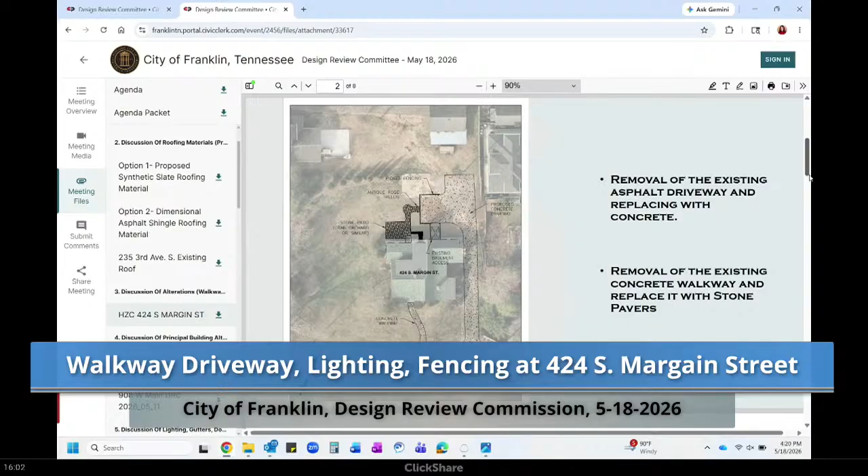And we would put the existing front walk to the front door back in its same location, but we'd like to pave it with stone pavers, similar to Crab Orchard stone, in an ashlar pattern. And we have a patio in the back near the rear door that we'd also like to be an ashlar pattern of stone.

And then we'd separate the parking area from the patio with a 3 to 3.5 foot picket fence, which I think I have. There's the pattern of the stone we'd use for the front walkway and driveway with cobblestone edging. It's not a bright white concrete, it's similar to being sandblasted, but you don't have the mess of sandblasting with sand particles going everywhere. And there's a picture of the proposed fence.

We exchanged a light fixture on the front of the house to a gas light fixture. And then we were forced by electrical codes to put an electric light fixture by the side door on the front of the house, right there. And those are copper fixtures made by Bevolo, a reputable company out of New Orleans. And that's what we would like to do.

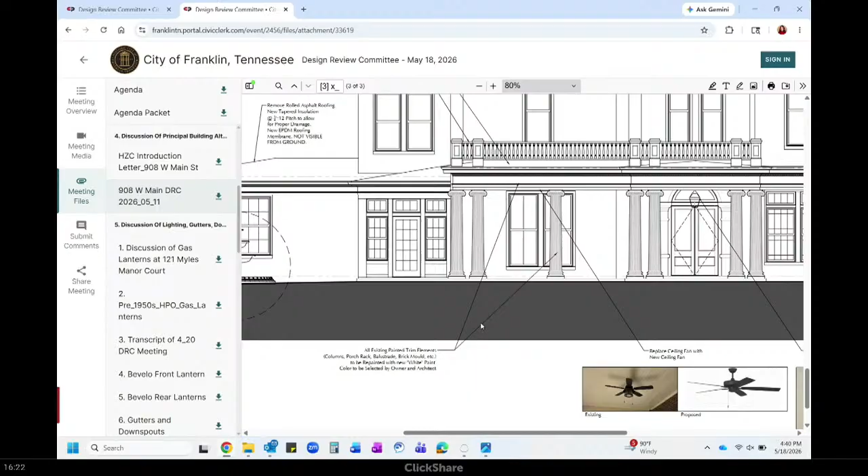A new ceiling fan and a new light fixture. The light fixture is that sort of lantern there that you see on the right. It will not have a solid back on it, it will actually suspend from the ceiling. But that's the best picture that 14th Colony has of that particular style. And you see what's there today, this kind of hexagonal lantern. Did I catch everything?

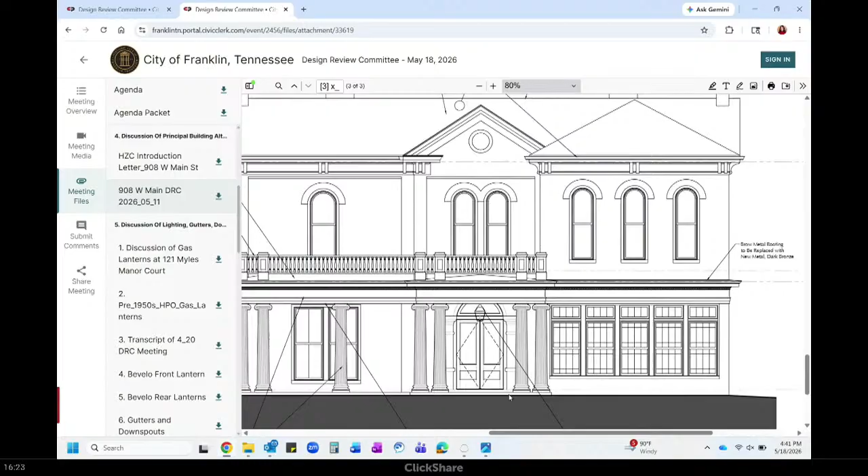The fountain doesn't work, nor does the pool hold water, so they're going to replace it with that fountain there, which is of similar scale and size to the one that's there. I think I've heard from many neighbors they're excited to get the fountain back in that view and just kind of the noise of it walking down Main. So those are the items we have for this trip.

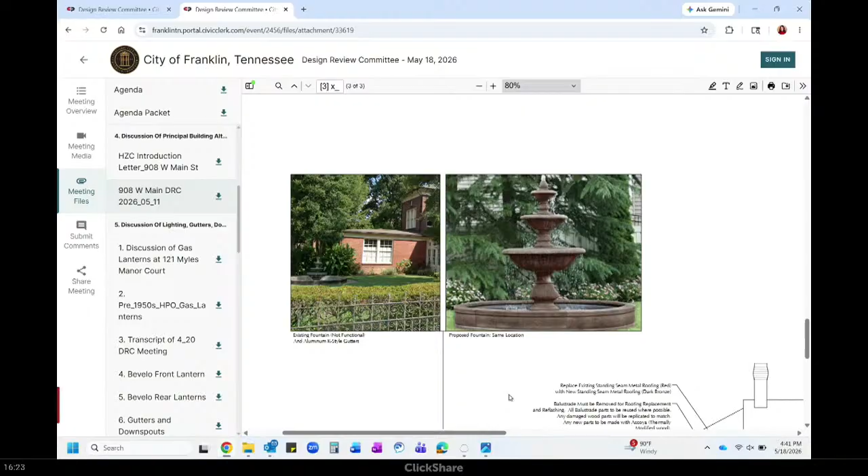Thank you. The property located at 908 West Main, locally known as Maple Dean, is located in the Hincheyville National Register Historic District and is considered a contributing 1881 building. The proposal includes alterations to the roof, repainting areas that are currently painted, reinstallation of a square pilaster to the front of the building, repairing and replacing deteriorated wood elements, replacement of a fountain, replacement of ceiling fans, K-style gutters, and a new light fixture on the front of the building. All of the proposed alterations appear to align with the guidelines. It is recommended to include photos and a description of the pilaster that is proposed to be recreated on the front elevation for the Historic Zoning Commission to review. Thank you.

So this pilaster, there's one on the other side that you would be going by? No, there's not, we just have a picture of it. And it looks as though they've got some paint and caulk lines that are stuck to the brick, so we know the exact profile of the crown and everything that was on it. And then we have a picture of it looking kind of right at that corner. And you can tell from the plinth, which is a limestone plinth, that it was a square column. We have the picture of it, and we'll be able to recreate the profile. I don't know that this whole porch on the front is original to the first version of this house. Yeah, there's the brick pilaster, but there's an actual column outline on that pilaster back there. It's kind of peculiar.

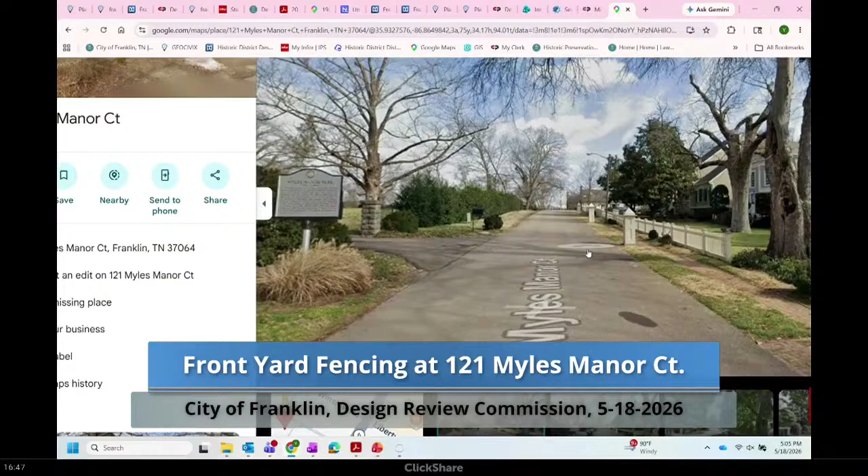and look at it, because, I mean, I know these homes are built in the 90s, but they are very much designed to be like historic homes. These fences are more stylized, which is some of what we took inspiration from.

But we would not do that. That was some infill project done before historic zoning. Yeah, and I don't know that those fences would have been approved.

Okay, but you do like the one on the corner? Yeah. I don't think... you can tell all those are very similar, but one looks more appropriate than the other. And it's just those little scale things, the width of the pickets, all the connections. It's all those little things that make it right or not.

So I think you're headed in the right direction, it's just simplifying what you had pulled up. If you were using that one on Main Street as precedence, well, that's beautiful, but just remember your house is a little simpler than that one, and that's it. I think you're headed in the right direction.

Cool, it's a beautiful fence, and it's spectacular. But I do think that if you did something like this in front of your house, it would be sort of the fence that's wearing the house instead of the house wearing the fence. And I think that the simpler version would be a beautiful addition to what you're doing.

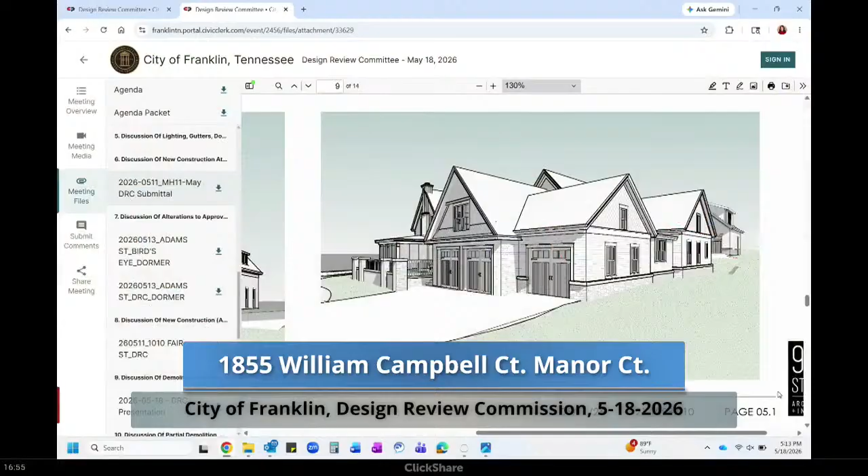The roofing configuration is somewhat complex in comparison to the traditional roofing configurations seen on the historic mansion. The guidelines recommend reinforcing and maintaining roof forms and orientations of adjacent structures. One end of the primary ridge has a hipped roof, and the other end has a gable, which appears to be a roof form not common in adjacent buildings.

Additional details and ornamentation are proposed on the building with the proposed fish scale siding. Feedback about the proposed detailing as it relates to the architectural style, in comparison to the historic mansion, would be appreciated.

The front porch configuration appears consistent with the location of porches seen on the street and on the architectural style. The columns proposed utilize a stone base and round column on top. The guidelines recommend designing porches with depths of at least 6 feet and simple columns and balusters using wood or brick elements. A stone foundation is proposed around the building, and the guidelines recommend brick, concrete, stucco, or painted CMU for foundations. Feedback about the foundation configuration and materials would be appreciated.

The front entrance is a set of double doors that appear to be 2/3 light and paneled, featuring a transom window. A number of different sized windows are proposed, as well as architectural windows on the front facade. The windows feature a 2/2 light pattern and have the appearance of being double hung. The windows in the gable on the front appear to intercept trim pieces.

On the left elevation, a set of double windows appears to be located in a non-traditional location, not in alignment with the other windows. Feedback about the proposed window size and placement would be appreciated, as the guidelines recommend maintaining the rhythm and spacing of windows and door openings of adjacent structures, and not exceeding the height and width ratios of windows and doors of adjacent buildings by more than 10%.

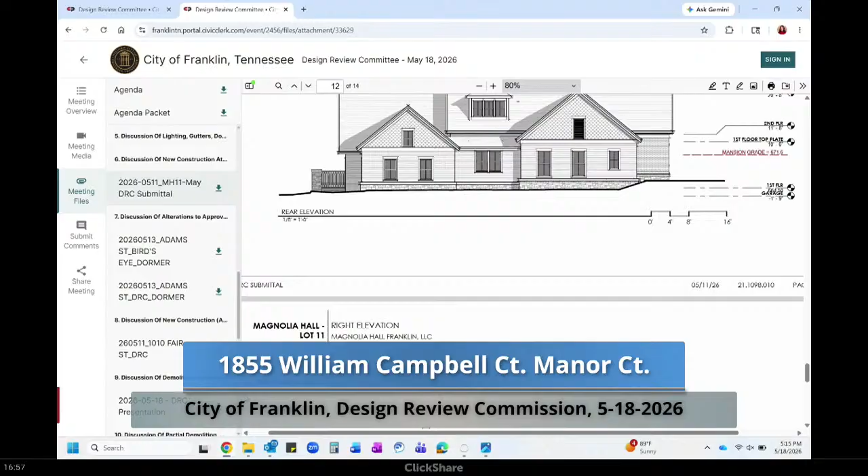Thank you. Okay, thank you. All right, anyone want to start?

Can I say one thing on the stone foundations? Sure, go ahead. We do have stone foundations on all of the other houses in the neighborhood. Okay. Understood.

I can start with a couple comments, I guess. I like the adjustments you made. I feel like it's starting to at least look like a particular style. There was a little bit of this, a little bit of that.

I agree with staff that this hip on one side, gable on the other, is a little odd, and I think it might help the elevation and give you more space to just gable that other end, square it back off. Even though there's a lot of roof gymnastics going on behind, I think it puts the front of the house in a somewhat purer format where you've got a main roof and some appendages like the front facing gables and a dormer. It will feel simple, as opposed to having a little hip here, a gable there, where the hip accentuates the roof plane of that front facing gable in a way that might truncate it a little bit, making it feel more traditional.

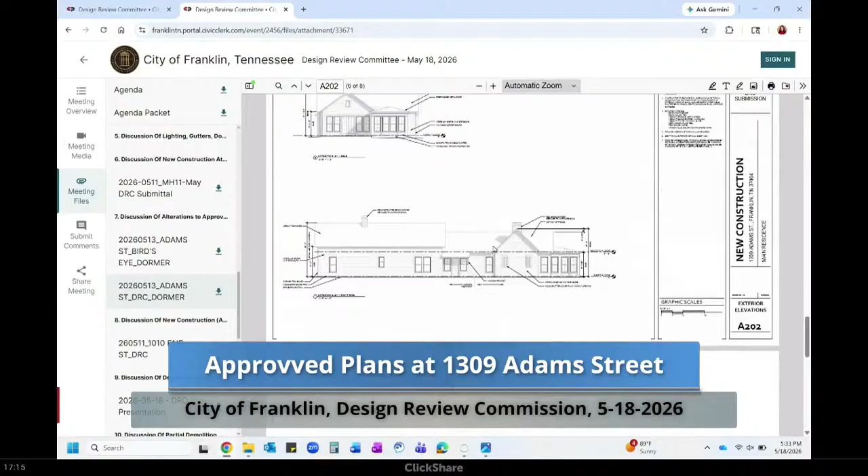There's a section cut as well on another document, if that might be helpful, so you can understand the space inside there and what we're working with. It's on page A301... there we go. So you can see how it's tucked inside the gable itself. It's not this big cavernous thing we are asking for up on top. It's still very small, and we've squished it as much as we feel is comfortable to make it still usable.

Any feedback, anybody?

Mary asked: So it is going to be the same height as the roof of the house, is that correct? It is stepped down from the main gable. It's stepped down, yes, about that much.

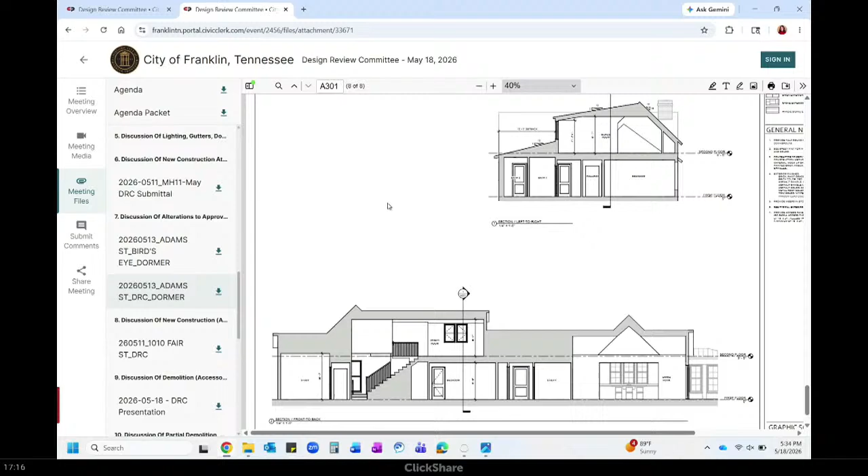I'm looking at that section. The thing that has made me not be a fan of this is we're losing the main form, in my mind, of the house that was originally there. And...

I don't know if it maybe came out further and lined up with where the little window that looks like a bathroom window is, if it came to that corner and lined up, would you read the main form of the house better? I don't know. That is where my concern is, just trying to appreciate what was there and what we're trying to replace with infill because it was...

...such bad condition. Mr. Chair, can I interject too? Go ahead, Kathy. I understand exactly what you're saying, but Ben, thank you for these two bird's eye views, which sometimes helps clarify things, but sometimes this is not how we see it in the real world.

You will never see this little top addition. I think if, to your point Mary, we brought it more to form-fit the existing part of the house, that would have a reverse effect on it. And remember, we're viewing this from the ground, so I think they've accomplished it, but you're going to view it from a distance too.

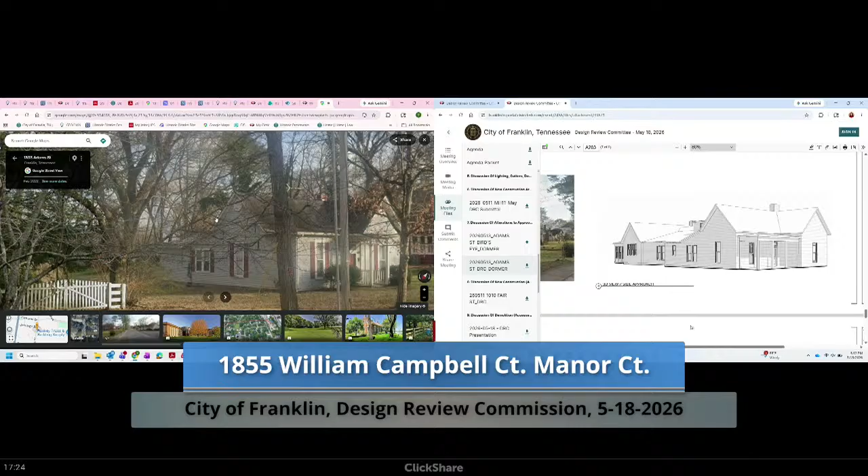I've drove down this street like 10 times this weekend, going back and forth, trying to look out the corner of my eye to see what I would see. You'll see a peek of it, but I think what's going to be a huge help to that roof line is this addition—your eye's going to be drawn further back. The house isn't just stopping right there, it keeps going.

I think what we do see of it does look more like a traditional dormer, as if it were just the dormer with the two windows. If you didn't walk in the yard and go look, you'll never know that even existed. So it looks like from the street a traditional dormer. It's a shed dormer, which is pretty common, especially for this style of house—oftentimes had a rear-facing gable added on, and then they would sometimes peel up the roof to give a little bit of volume. I think that's what this is going to look like, even though there's a little connecting piece that nobody's going to see. So I don't have a problem with this as it's shown.

It's hidden enough, and it looks like a traditional dormer from any public view shed, and that's really what I think the guidelines are aiming at.

If this were pulled out further, we'd get into that discussion where this looks like a two-story house, and it's not. I don't think this looks like two-story, it looks like a dormer. It's way back on the roof. How far back on the roof is it?

It's a dimension down here, it's like 12 feet back, away from the edge. Yeah, it's 13, some change. So our rules say a foot, and this is 13 times that, so it's going to sit pretty far back.

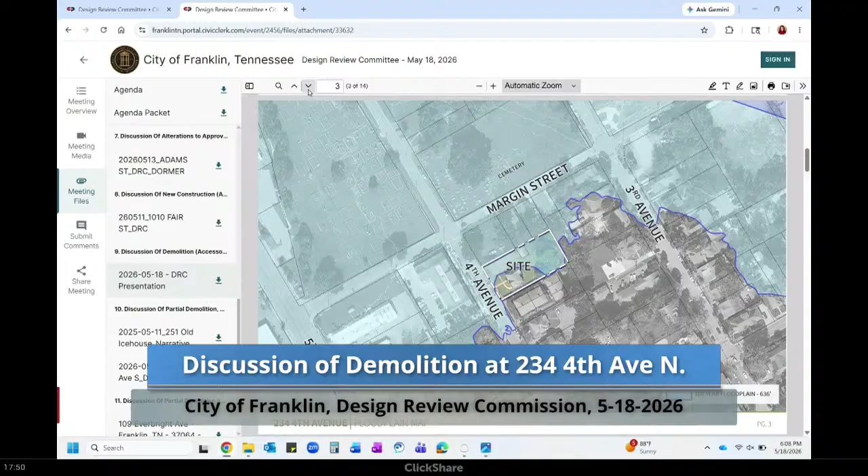So we've been working hard with the team to come up with something we feel will be a really helpful addition, not only for our purposes but for the lot itself. With that, I'll turn it over to them.

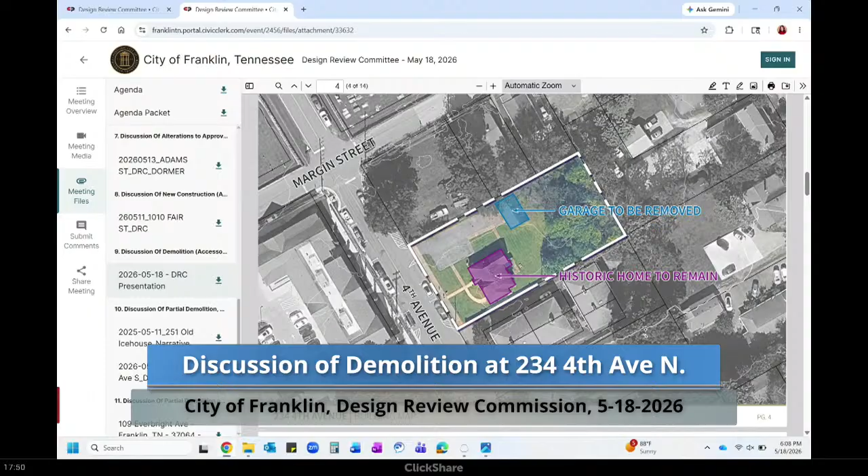Hi, I'm Greg Gamble. I'd like to give you a little background on the property for context. If you go to slide 2, this is its location, on 4th Avenue. This is 234 4th Avenue. It's not on the corner of Margin, there's another lot in between.

On the zoning map, the site is zoned office residential, meaning anything new has to be built in a residential form. It can have one principal structure and an accessory structure, so it's treated like a single-family residential home, but office is a permitted use on this property. The property directly adjacent, fronting onto Margin Street, is in the 5th Avenue district, and on those properties parking can be under the building, which is one of the unique aspects of that district.

On the next slide, this shows the extents of the 100-year floodplain from the Harpeth River. You can see about two-thirds of the property at 234 is currently within the 100-year flood limits, and the accessory structure we'll be talking about today is also within the 100-year floodplain. This is the location—the accessory structure is the garage, the building shown in blue.

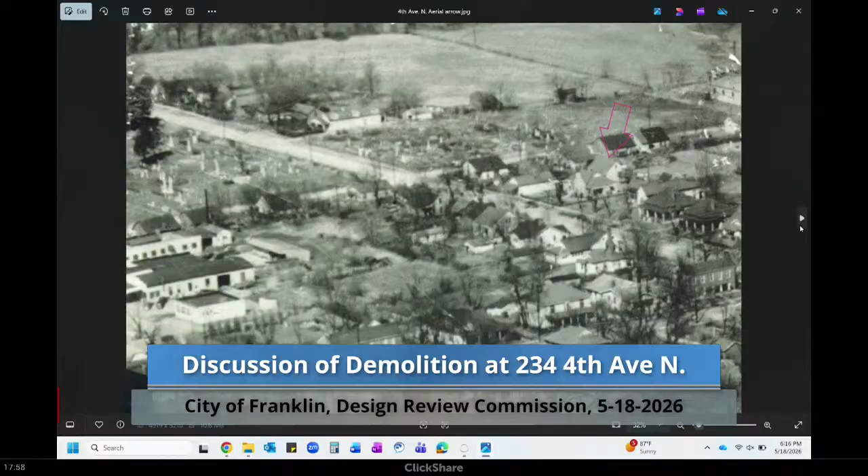Then the next image is from the 1948 flood. So if you zoom in by the arrow, you can see the structure, the gable.

So it is up to the Historic Zoning Commission to determine if it is contributing to the historic district.

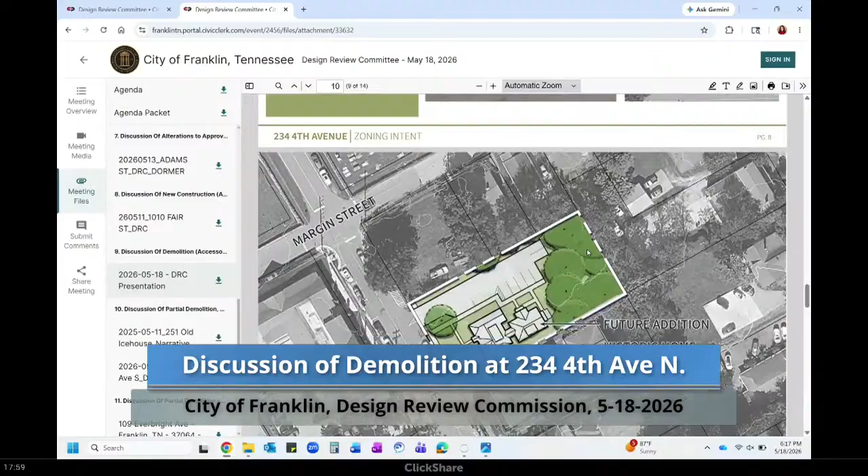For the request, so that is for the demolition, to move on to the proposal for an addition, the request to construct an addition to the principal building, information is needed to determine the historic footprint of the principal building and if the proposed addition is appropriately sized.

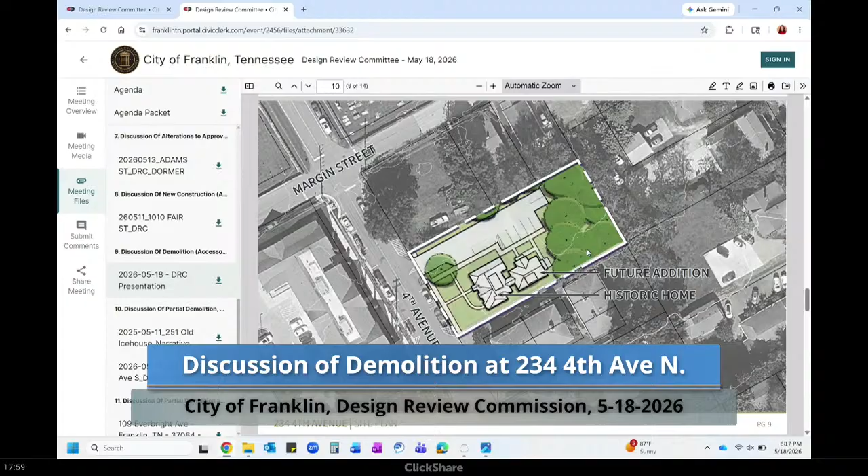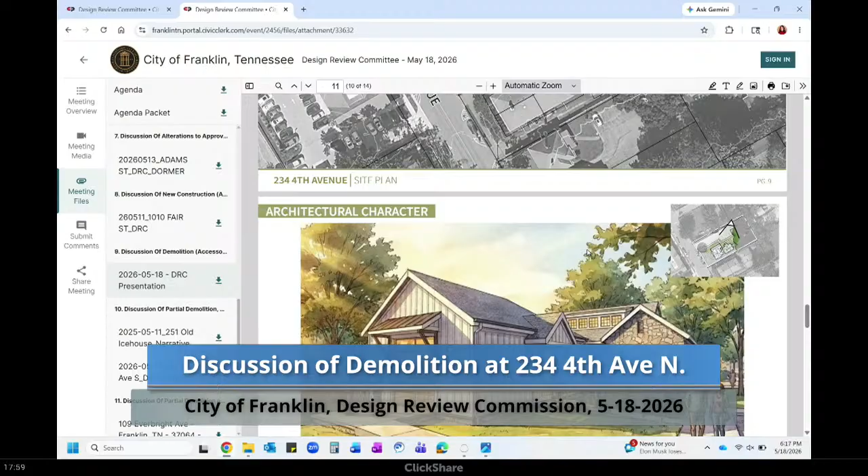In terms of materials, it may be more appropriate to utilize horizontal lap siding on the addition so that it would blend better with other elements seen on the building. On this elevation, you can see that there are different roof lines, that one is hipped and one is gabled.

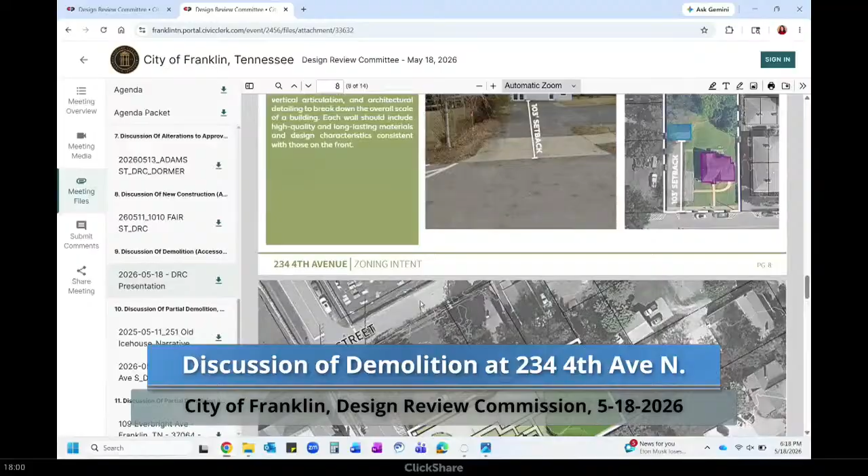For the entrance, the guidelines recommend designing doors and doorways to an addition to read as secondary in appearance and detailing to the historic building. The main entrance to the historic building is a simplified entrance, just a 15-light door. So the double door with detailing does appear to be a little bit more elaborate than the front door.

Several project considerations were left on the project review. I did want to highlight one of them that states, while it's not on the plans for approval, the proposed addition appears to be bringing the existing structure into the 100-year floodplain. It is recommended to reach out to staff and schedule a meeting to discuss the proposed addition and floodplain requirements that could give significant impact on the design of the addition. Thank you.

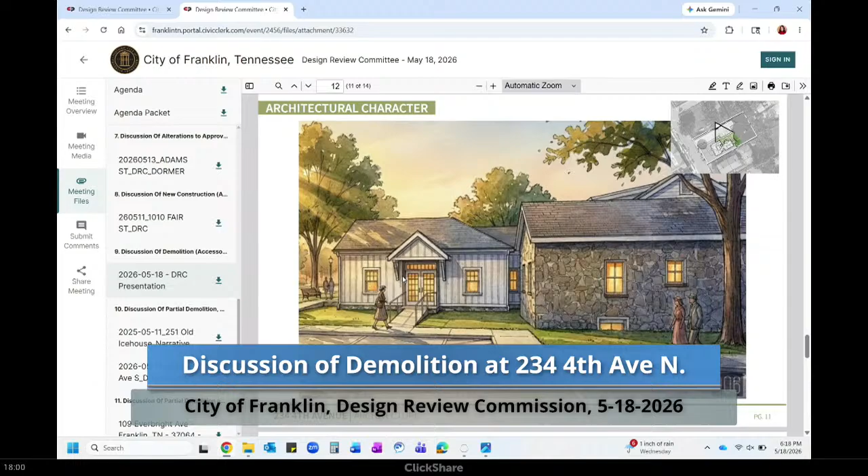So what was that last one, the new additions in the floodplain? Yes, we specifically kept... I don't know if we've got an overlay that shows both the addition and the floodplain. You can barely see it on page 9. There's a little white line that represents the floodplain. If you zoom in, that little line.

Okay, I was like, what are we talking about then? So it's this white line that runs through the woods, cuts out towards the parking lot, runs down the parking lot. That's the one, because there's a bunch of white lines, but that's the one, that's the floodplain.

And I did want to provide that the accessory structure would not need a variance to be raised, as that is not something that is required if it is used for storage and/or parking. Storage or garage, it doesn't have to be raised. Correct. Okay, all right. Let's hear from some commissioners here.

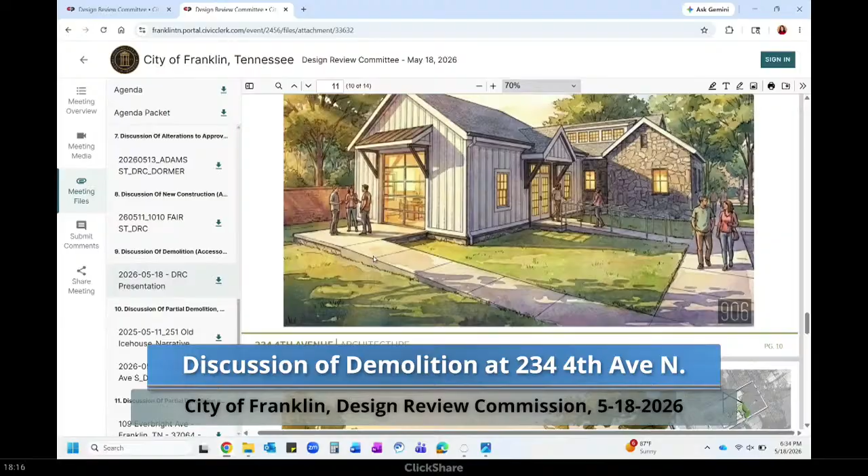So potentially we could just have one instead of both. Yeah, we ended up - the first one to the right, I guess you'd say, was coming directly off the parking lot for convenience. We added the other one for loading and unloading, and since we're gonna do that overhead door, it doesn't function as an accessible entry point.

But because the slopes were a little lower, we thought it might make sense - I think it'll make more sense if there's not a railing there. Well, maybe you can grade some of that out. It only looks like 8 or 10 inches. At least one of them you could grade out, and the other one...

Greg will tell you all the horror stories of trying to grade near a floodplain. So have fun with that. If you know what a HEC-RAS model is, it's my favorite thing in the world.

Okay, the roof line thing - one side hipped, if you can gable both ends, I think it'll just look more correct. There's instances where you have to do that. This may not be one of them.

Go ahead, Mary. I don't see putting the transom there - it's supposed to read secondary to the house. I have similar comments too, that it just looks heavy in the middle, with the brackets. Yeah, I don't disagree, it's just too overbearing.

And then, could you get away with a single door? I think so, especially with the sidelights point from earlier - the loading entrance is on the back, so it would still be ADA compliant. I think there's a couple levels of simplification that can make that feel lighter and feel a little better.

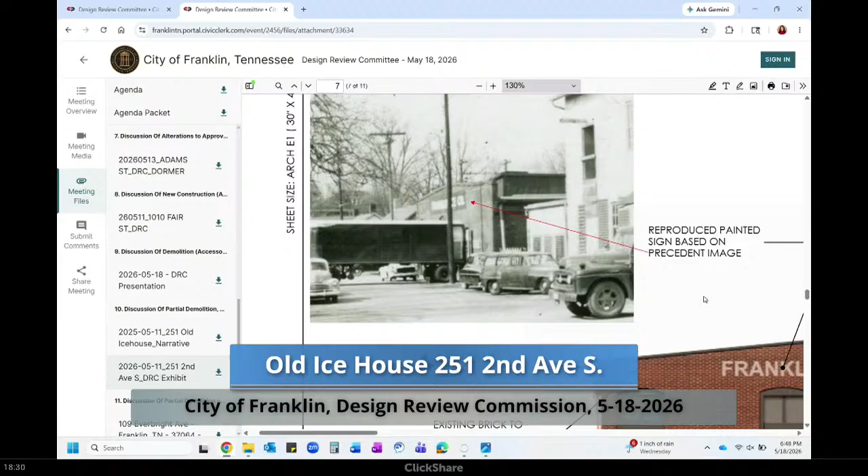I will say we had the Franklin Ice Company. That's a new piece we proposed, inspired by this photograph where we've got precedent for having something there previously. We thought it would be a way to bring back that faded lettering, again celebrating the history of the site. So those are the changes.

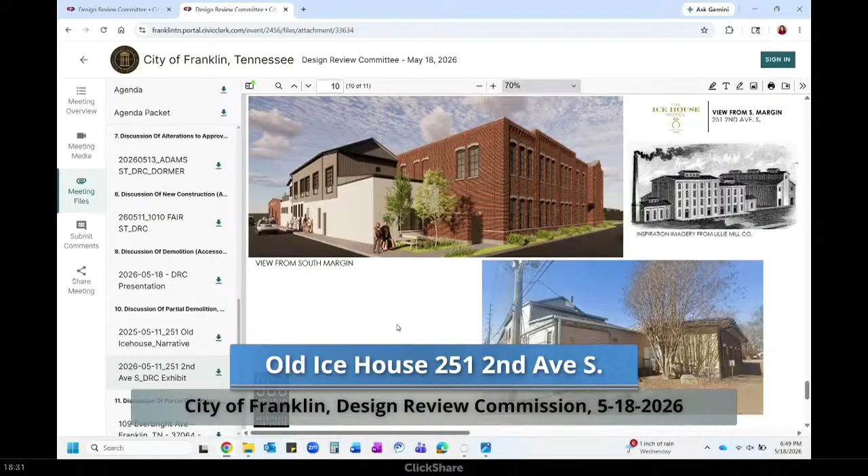The proposed addition appears to remain subordinate in height and scale to the remainder of the historic building on the site. Feedback about the proposed brick detailing on the 2-story addition would be appreciated, as the guidelines recommend using details and ornamentation similar in character and proportion, but less elaborate than those on the historic building, which appears very simple in detailing. Additional feedback about the proposed windows would be appreciated.

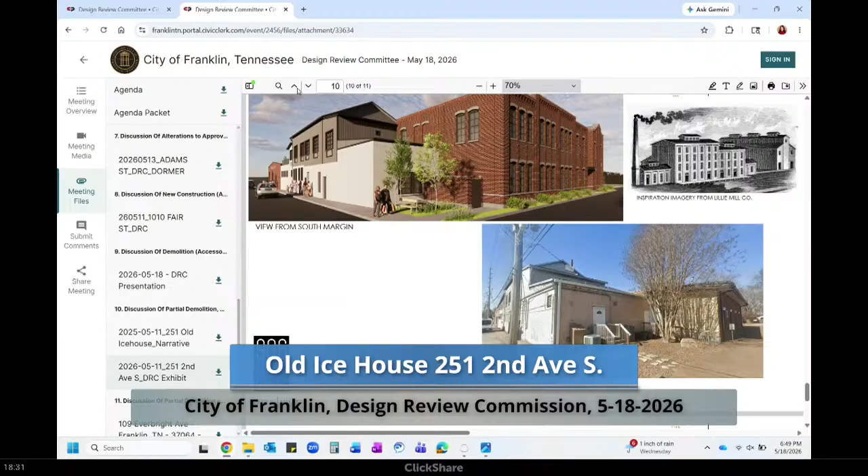Alterations to the building include adding 3 new openings along South Margin Street and on the rear of the building. The guidelines recommend against adding new openings along highly visible facades. Feedback on this would be appreciated.

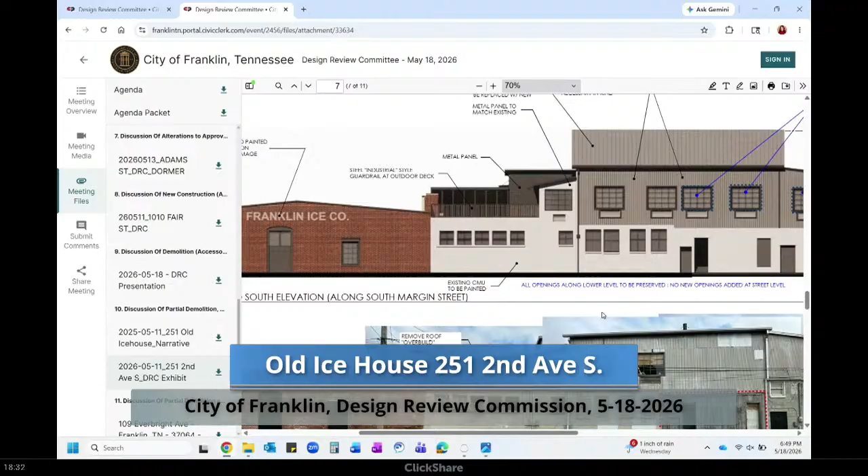Additionally, changes have been made to the new rooftop feature, where sections of the roofing are proposed to be removed. New openings are proposed to the section of the 2-story chicken processing plant part of the site on the left elevation that will be visible.

On the rooftop, new chimneys are proposed in an undulating pattern. Feedback about whether or not chimneys are appropriate to the building and site would be appreciated, as the guidelines recommend it is considered appropriate to design chimneys to be compatible in materials and detailing, but simpler and subordinate in massing and height to historic chimneys. The proposed chimneys appear simple in detailing, and additional perspectives may be needed to understand the visibility of this element.

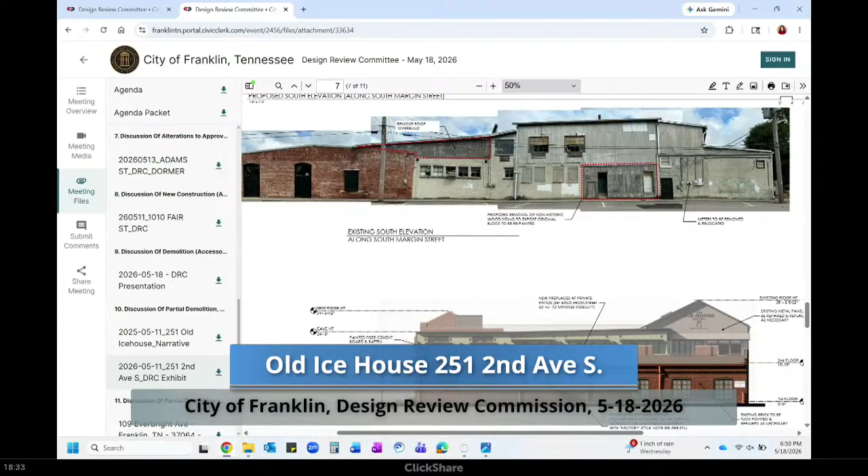It is now proposed to replace the non-historic windows on the ice house with new multi-light windows. Additional information about the window materials and profiles are needed for consideration, and feedback from the commissioners would be appreciated about the proposed window pattern for the sections of the historic building and the proposed pattern on the addition as well. The guidelines recommend using window patterns and historic profiles and dimensions that match the light pattern of windows on the historic building, of which there are very few examples left.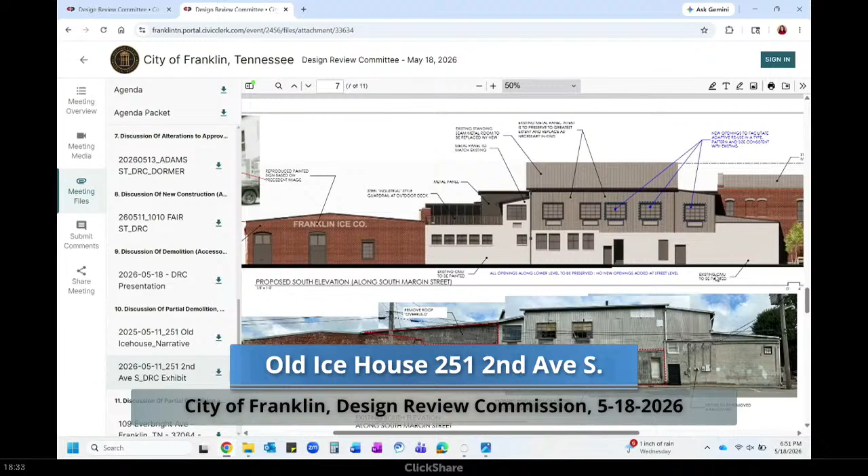Windows should have distinct meeting rails and have the appearance of being operable. The guidelines for additions to historic buildings, and guidelines for historic buildings, recommend for late 19th century buildings 4/4, 2/2, or 1/1, and for early 20th century designs, 1/1 sashes would be installed. The site features a unique combination of ages and buildings added over time, and has a unique utilitarian history, so feedback about the proposed window design profiles would be appreciated.

And so we commend the applicant for noting the preservation of materials where possible, and additional information comparing the proposed replacement materials would be needed. Thank you.

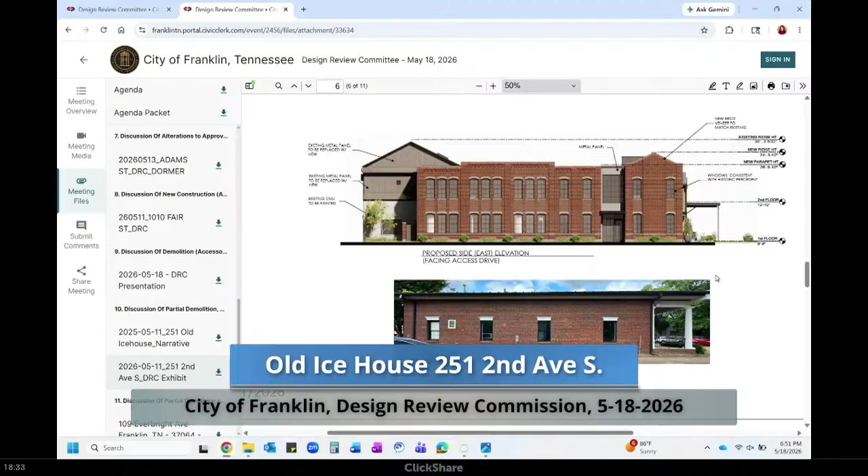Okay, thank you. All right. Somebody want to start us? Kathy?

I think it's looking really fantastic. And I'm happy for the name, the Ice House, not Chicken Shack. Troy's idea, Chicken Shack—I wanted Chicken Shack. Troy wanted Ice House. Not a happy place for the chickens to go, but anyway.

Something that stuck out with what staff was talking about was identifying the new building. The brickwork is beautiful, but it almost looks like the new portion appears to be the historical portion. So it's kind of a play on the simplicity of the historical brick building. How do we tone this down, but still give it detailing so that it reads well? It reads beautifully.

But if I knew nothing about this project, I would say that's the historical building, the one on the top. So removing the balconies was awesome, because it does not look like Broadway where everybody's hanging out off of the end. It just really gave it a lot more character and presence. But it is reading more like it is the star of the show.

And I don't know if the stone headers change, if less detailing in the brick, maybe more simplistic—but don't forget about that brick detailing, because it's what makes this elevation. It's very handsome, but it is reading as super significant. And I thought that was really a good point that staff brought out. That struck me the most.

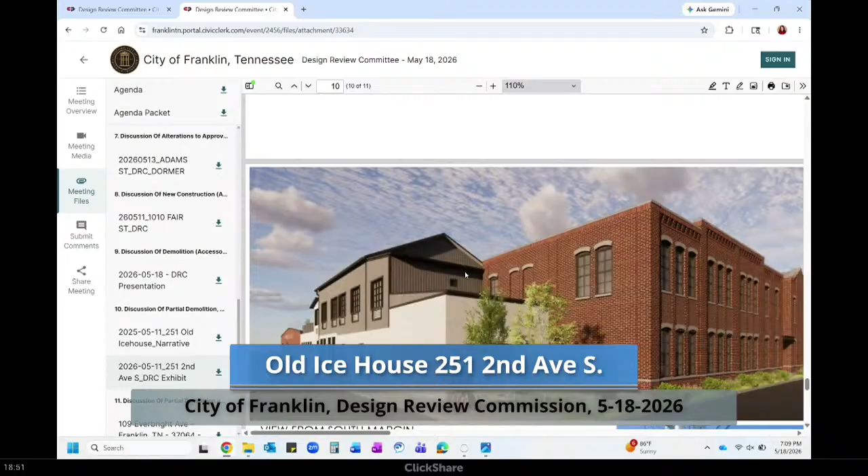I'd love to see it from the intersection of Margin, just show us, because if you can't see them, then you can't see them looking at Margin. I don't think you're going to see him, you're on the other side. I think the only place you're going to see it is maybe the street entry into the park, if you lower the camera down, you'd maybe see a couple. Okay.

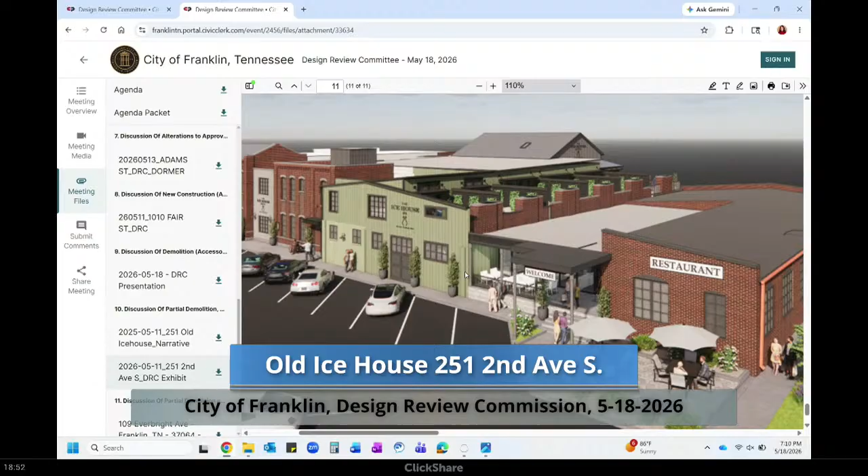I think it's a really handsome feature for a boutique hotel to have that. I can see how it would be the room to get, the space to be on in the evening. But it's small enough that it can't be a party on the roof kind of thing, and I think you've accomplished that.

No, the point is very well taken, and I think the size of those works against it. I'll be honest, there's another level of articulation and detailing that needs to happen with those. They're not quite there yet. Please detail that wonderfully.

Don't have to do it, but just do it to where you kind of see down the street. Absolutely, I like that. One other quick question too, any rooftop mechanical, what have you got going on? How are we hiding that? With screen walls.

We'll have, and that's where we are in design. We don't know exactly where that's going to be, the elevator. I would anticipate some of that being around that elevator. We may even have a lower screen wall between the elevator piece and the edge.

We're certainly going to do everything we can do to move it out of the way. Making that roof flat gives us some place to put it, and it's on the back of the building, so it certainly will not be visible from Margin or Second.

That's always the beast. Yeah. Yes. Everybody good? Yeah. All right. Thank you. Thank you all very much. Exciting. Thank you.

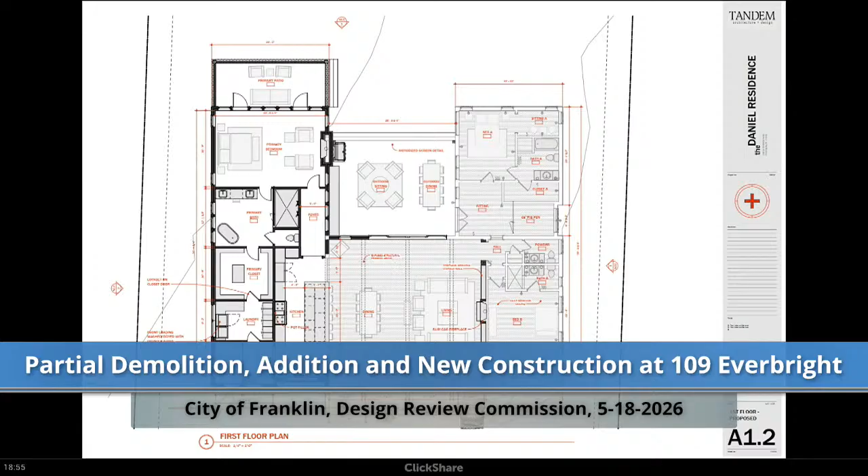The addition actually pulls in the footprint just a little bit and then takes a liberty of going into the rear yard that won't be seen from the street. It tries to maintain the character from the front and also captures some of the space we have in the rear yard because it actually goes pretty deep into the lot, so they're able to achieve their hopes for the inside of the house program layout between the primary bedroom, the kitchen that tucks in, and the accessory uses that attach as well.

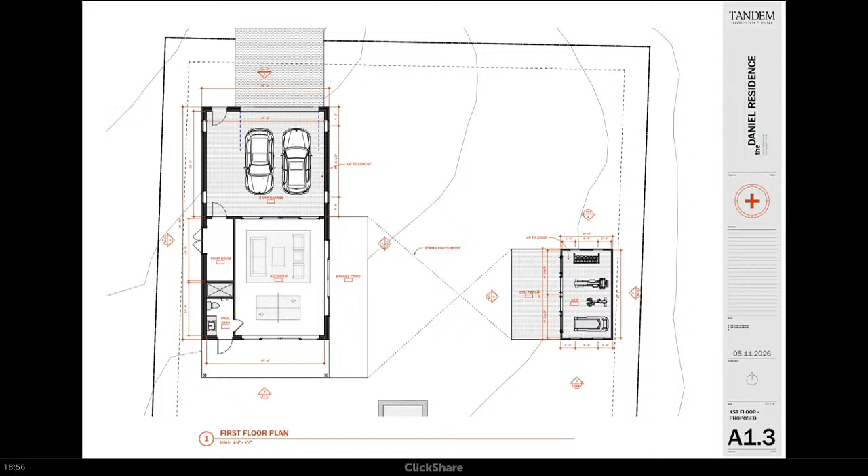This is a drawing that shows the garage structure and the lounge space that's attached, and the future pool bathhouse that goes there as well. We have some planning for maybe string lights and things that will connect these two structures just to make a nice backyard, but that's not quite for today's conversation. And then also a shed structure that will live in the rear yard as well.

There's a couple of recesses in the brick every, I think, third course, and then at the base of the brick, there's this two-course extrusion, maybe by an inch or so. Some horizontal lap siding pulls in similar characteristics from the other sides of the house, along with a frieze board that matches and pulls across as well.

And the windows, we don't have to go into it quite yet, but Pella Reserve traditional windows that were used in a previous addition the owner has done would match the same sort of mullion styles. I think it's just like a single horizontal stripe at each window piece.

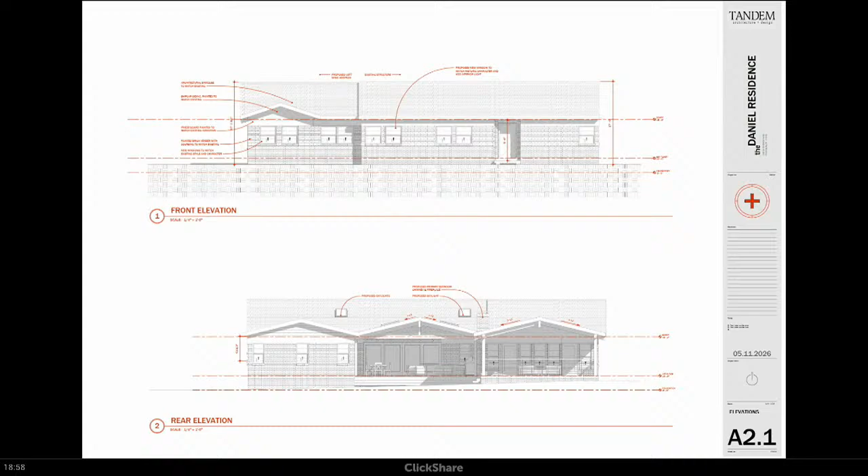You're kind of seeing the master porch way in the distance, but this is the side that shows the same sort of architectural elements, the brick banding, the frieze board, and the horizontal siding as well. This addition was done probably 5 years ago or so, and matches the same character into the rear yard.

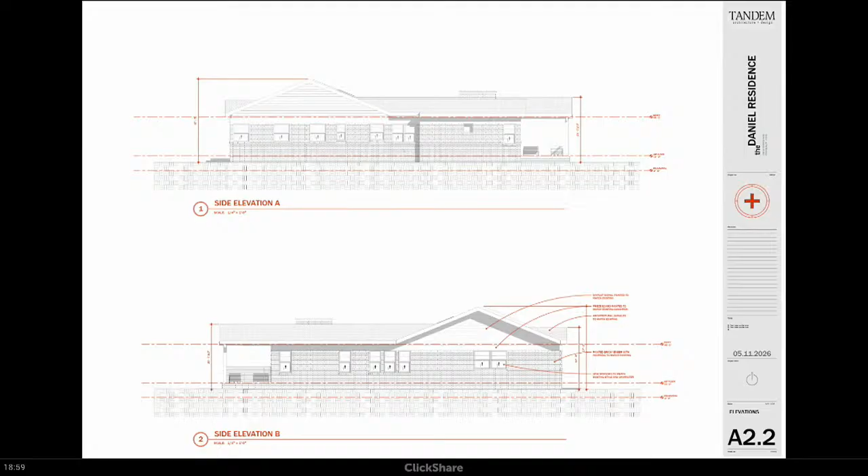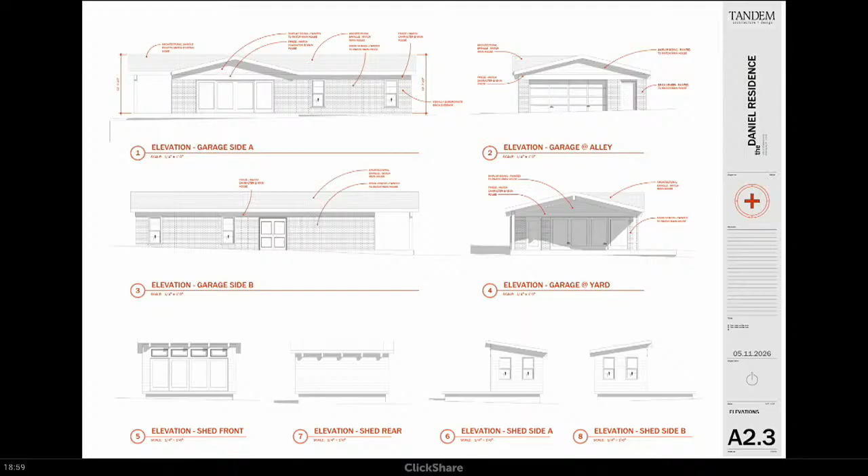And then this is just a series of elevations of the accessory structures, the top floor of the garage. We're trying to make that a kind of secondary-like structure from the historical standards, so that brick detailing starts to remove away, but we still have the same architectural elements, brick and frieze board and horizontal, but less brick detailing to try and keep it secondary to the structure.

And yeah, this is just a square footage diagram. We can talk about it as we get into this. Is that the last sheet?

Yeah, yeah, I can leave it at that. This is a previously approved design that the owners wanted to show for a lot of context here.

They were awarded a COA for this design, which we think is actually a little bit larger, especially on the front-facing street character. So we're trying to pare that back from even what was approved before and allow for something that we would say is tasteful.

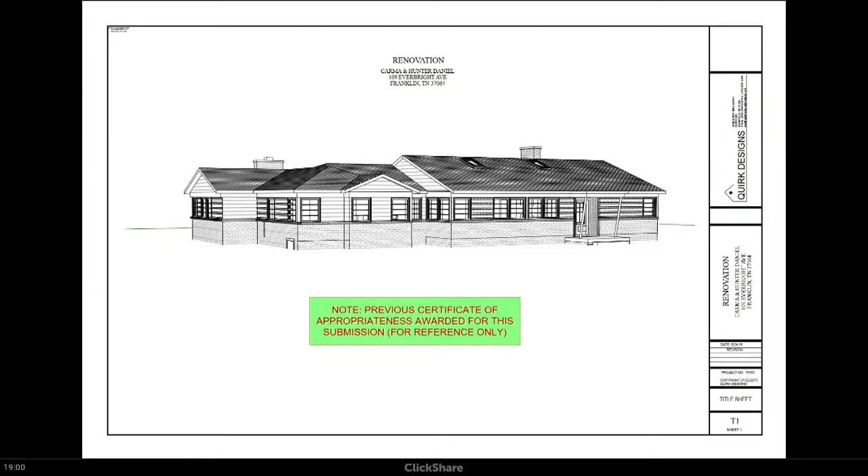Okay, let's hear from staff, please.

Thank you, Mr. Chair. So the property located at 109 Everbright Avenue is located in the Everbright Avenue Historic District. The building was constructed circa 1955 according to the Williamson County Property Assessor data, so that means it is approximately 71 years in age and may be considered historic in age by federal standards.

The Design Review Committee and Historic Zoning Commission previously reviewed several alterations, additions, and partial demolition in 2016, which were partially completed. The proposal for review today is the construction of a minor accessory structure, a larger accessory structure, partial demolition, and an addition to the principal building.

So we'll start off small and work our way up. For the minor accessory structure, let's get our elevations.

Okay, here we go. Minor accessory structures are permitted to have a maximum footprint of 200 square feet. The footprint of the structure is inclusive of everything under roof, this means covered porches, stoops, and breezeways. The measurements of the proposed structure will need to be updated to include the covered porch.

The use of the transom window on the elevation that will face the interior of the lot is unique and does not appear to relate to any transoms seen on the historic building. Material specifications for the exterior of the structure are needed to provide recommendations from the guidelines.

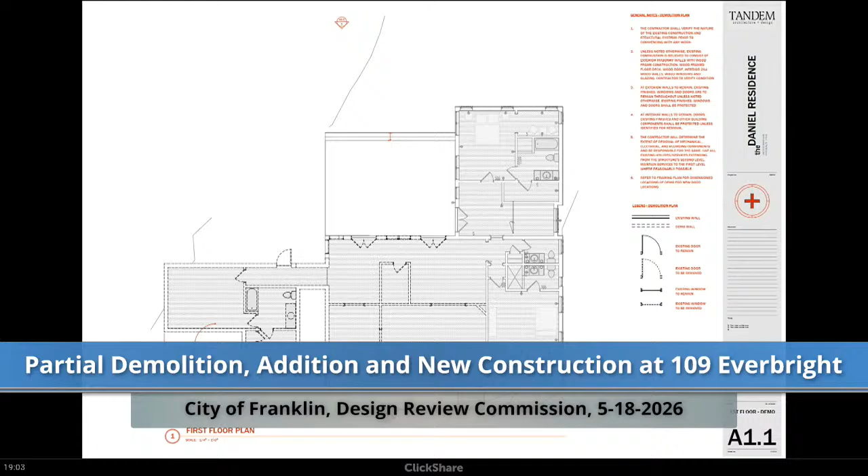The left front-facing portion of the historic principal building is proposed to be demolished and replaced with a new addition. The guidelines highly discourage demolition unless there are extraordinary circumstances, so as to maintain the integrity and sense of place associated with Franklin's historic districts.

Demolition may only be approved if the Historic Zoning Commission deems one of the following conditions met: if a building has lost its architectural and historic integrity and its removal will not adversely affect the historic district's character; if denial of the demolition will result in an unreasonable economic hardship on the applicant as determined by the Historic Zoning Commission; or if structural instability or deterioration of a property is demonstrated through a report by a structural engineer or architect with demonstrated experience working with historic structures.

In 2016, portions of the front elevation were proposed to be demolished and new additions were approved to infill areas around the demolition. What is proposed today is a complete demolition of 516 square feet.

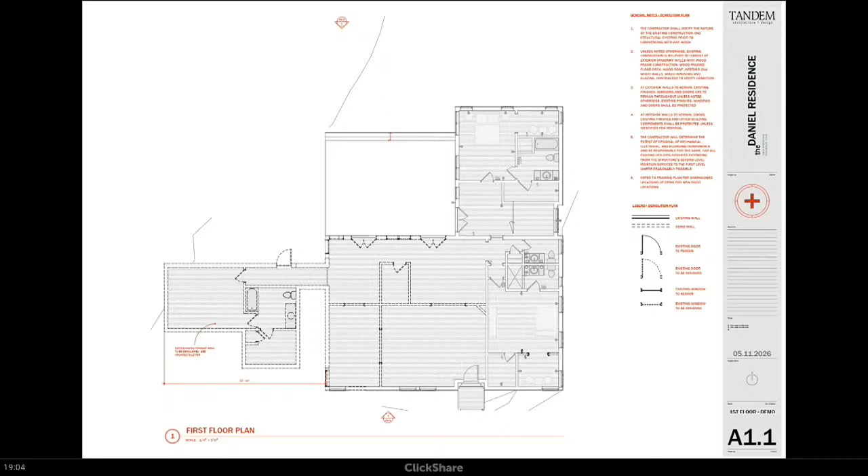Some information has been included within the application showing cosmetic deterioration of the portion of the building that is proposed to be demolished. A cost estimate analysis has been provided, but it is unknown who provided the estimates.

If the historic footprint is removed from the building and wholesale demolished, then the historic footprint would decrease by 516 square feet, and an addition would not be recommended by the guidelines.

However, if the square footage was kept, an additional 512 square feet could be added to the building, which could align with the guidelines' recommendation of an addition being 50% of the historic footprint.

When calculating the footprint of any addition, the footprint of the building is inclusive of everything under roof, which includes the covered porches, stoops, breezeways, etc.

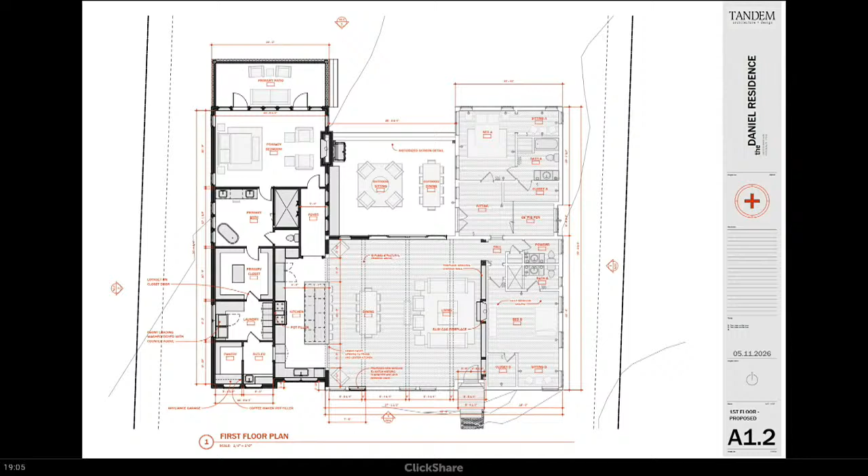For the alterations to the building, there are proposed chimneys, skylights, and a pool, and all appear to be appropriately placed per the guidelines. There are several project considerations that we will provide to the applicant within the DRC recap. Thank you. Okay, thank you.

Trying to think of where to start on this one. There's a lot. Let's talk about the main house first. Any feedback on that from y'all, Kathy?

I'll give a go at it. The portion that you're asking for demolition - do we have a picture or any of that information in this packet? We do. If you go to the very final page of this, there's an elevation. Last one, bottom right here.

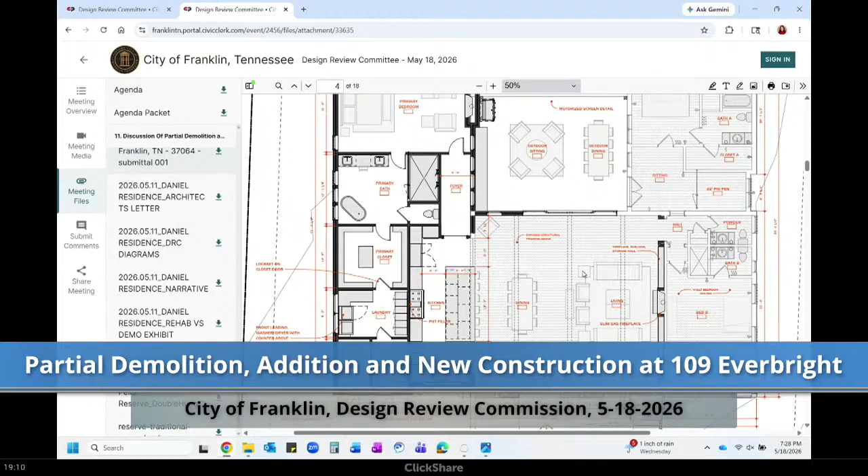I'll let someone else talk. It's a lot to take in and digest, but I think the demolition is going to be the hardest thing to get over unless you meet the requirements you need to submit for demolition.

To clarify, if we meet the criteria for demolition for the 3 points, we still have to look at it. Does the square footage reduction still come into play? If demolition is approved under one of those 3 criteria, you still get the reduction—so it's a disadvantage to do the demo regardless, because you're reducing your overall footprint. You can't build more than what that footprint would allow with the demolition.

It didn't come up last time. We're in new guidelines now. You're talking about back in 2016? In 2016, I looked at the staff report, and staff did recommend denial of the demolition, but the commission did vote to approve it. Just wanted to provide that.

Okay, what about you, Mary? Anything? I agree that covering the corner window is not something that would meet our guidelines.

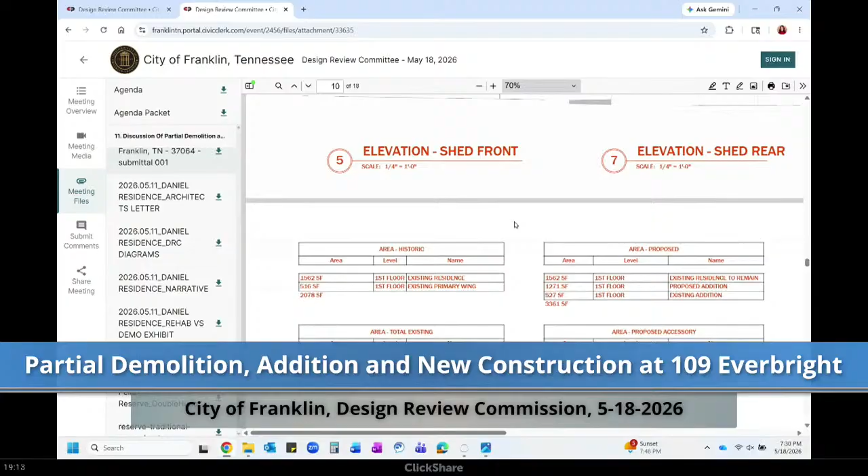Part of what exaggerates it is there's a lot of covered porch, and that counts in the number. So the covering is what counts. If it's a trellis but not fully covered, does that count as covered? It's anything under roof.

Those numbers were not included with measurements, some were, but not in a way we could compute, so we just wanted to double check. I think we have reviewed some trellises before, and those didn't count against footprint at the time since it's open, not under roof.

But would you guys consider offering some grace given the substantial size of the lot? I agree, yes, offering some grace on that. And if it turns out the part you want to demolish is just subpar construction, that might be the grace I'd give—but even then, you may need to come down some.

I think I hear the comment about the windows, and that makes a lot of sense. I think we could adjust the floor plan—I can see some ways that could be incorporated to maintain that mid-century modern corner, which would help a lot. It could also help to step it a bit so we can see it's a different front character. That's a good point for respecting the historical home with your addition. Do you have anything else, Mary?